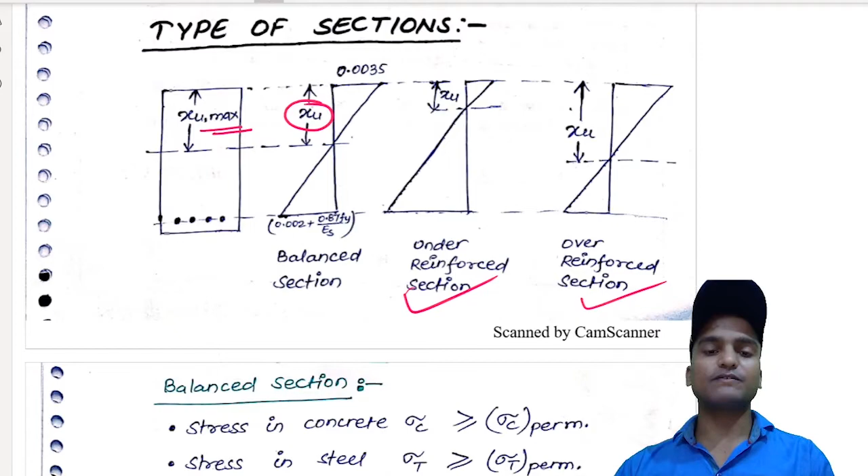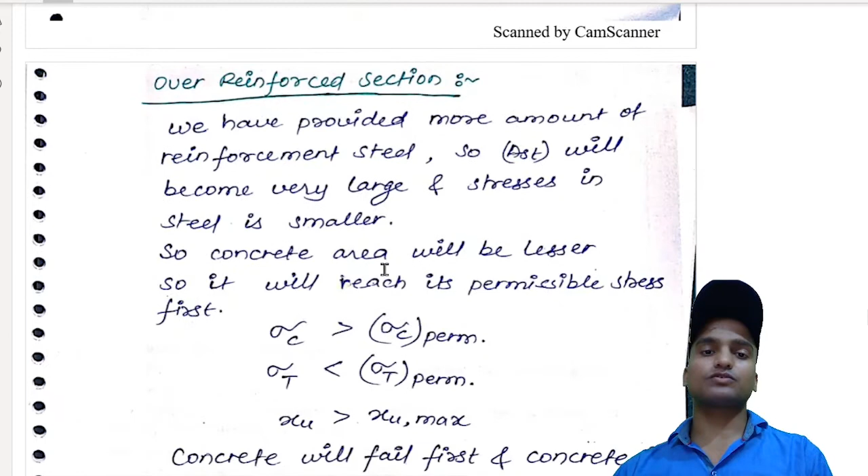The same thing is written here for the balance sections and the under reinforced sections, and we have discussed all this theory in the previous video also. You can go through that and learn how to calculate the moment of resistance in different cases. So basically we want our design to be under reinforced, and we try to avoid the over reinforced design.

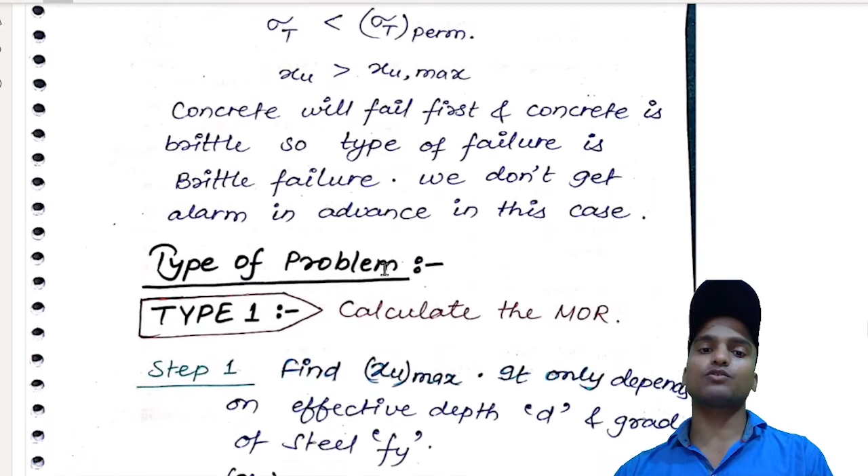Basically in RCC there are two types of problems. The first type is the analysis problem, where we are asked to calculate the moment of resistance. Moment of resistance is asked again and again because moment of resistance is the capacity of the beam.

In the analysis problem we are given all the data like the cross sectional dimensions and the grade of steel and concrete, and the area of steel is provided with the clear cover, and then we have to calculate the capacity of the beam - how much load, how much bending moment the beam as a flexural member can resist.

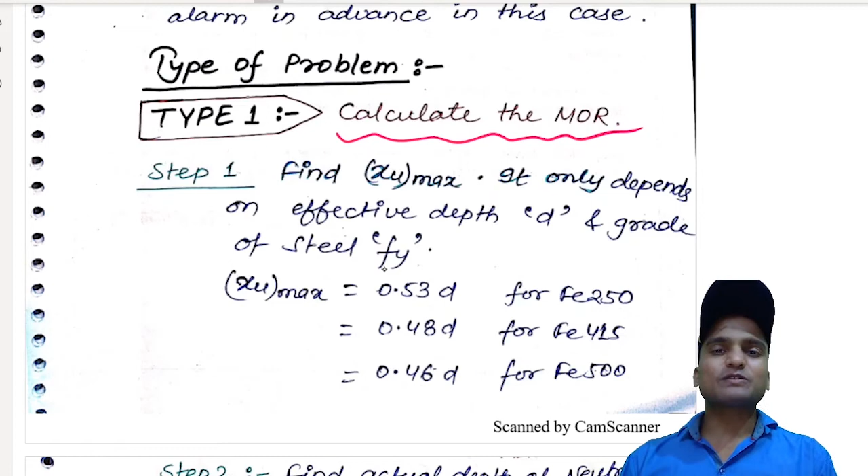These types of problems are the analysis problem, and here in the first step we have to first of all calculate the value of xu maximum. We all know the value of xu maximum only depends on effective depth d and grade of steel fy.

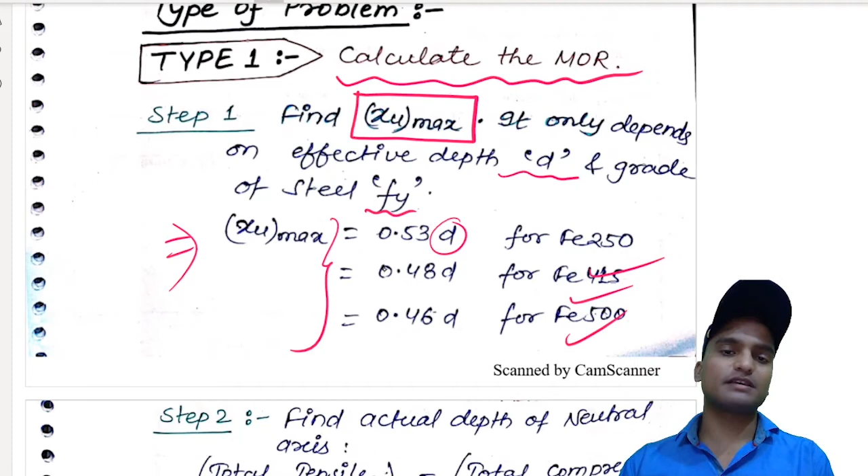We can remember all these three values of xu maximum, or it is also given in the IS code. So if we know the grade of steel Fe and we know the effective depth, then we can very easily calculate what is xu maximum for any cross section. Whatever may be the dimension, whatever may be the area of steel, whatever may be the grade of concrete - it doesn't matter. The value of xu max remains same for the same value of d and fy.

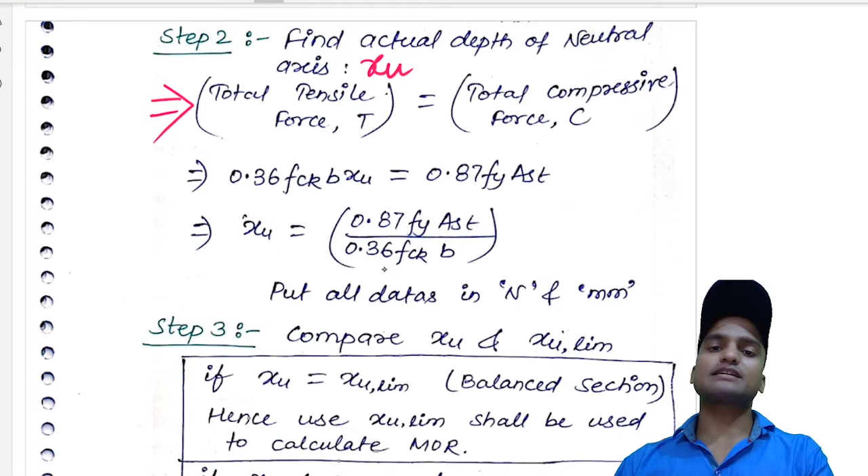After calculating xu maximum, in the next step we have to find out the actual depth of neutral axis, represented by xu. The basic fundamental of calculating xu is equating the tensile force and the compressive force, and we can easily do this and ultimately get the value of actual depth of neutral axis.

Now in these formulas you have to put the values of Fy, Fck, Ast and B in terms of Newton and millimeter. If the design strengths are given in megapascal, you can easily convert them into Newton per mm square, and the dimensions of the beam and the area of steel have to be taken in millimeter or millimeter square. Then you will get the value of xu or xu maximum in terms of millimeter. This is a very important point, please note it down.

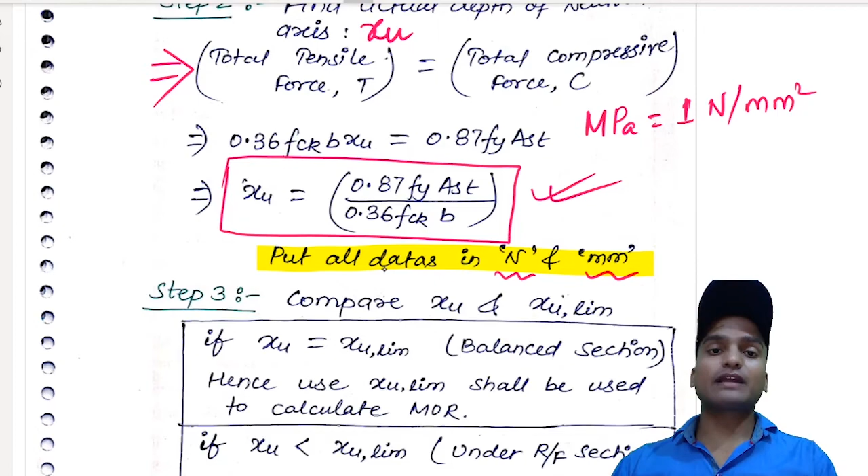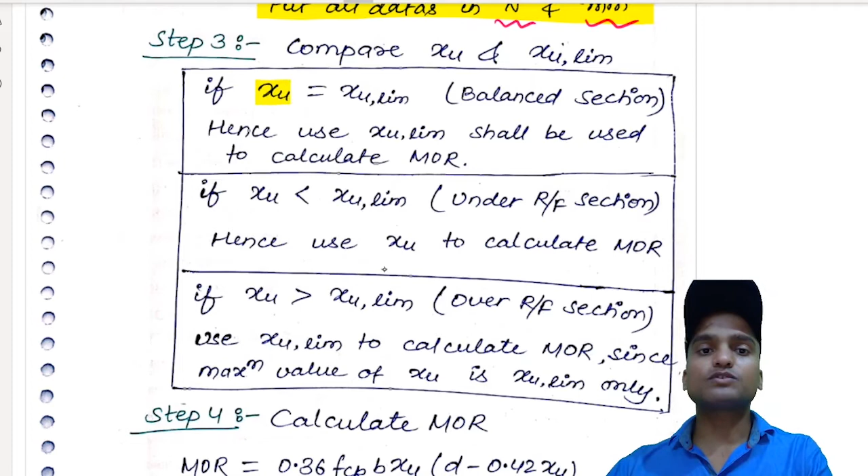After calculating the value of xu and xu limiting, we have to do a comparison. If by chance xu comes to be equal to xu limiting, then such a section is said to be a balance section, and it is very rare to obtain. In a balance section we can directly use the value of xu limiting for calculating moment of resistance. If the value of xu is less than the xu limiting, our section will be an under reinforced section, and in that case we just have to use the value of xu only to calculate the moment of resistance.

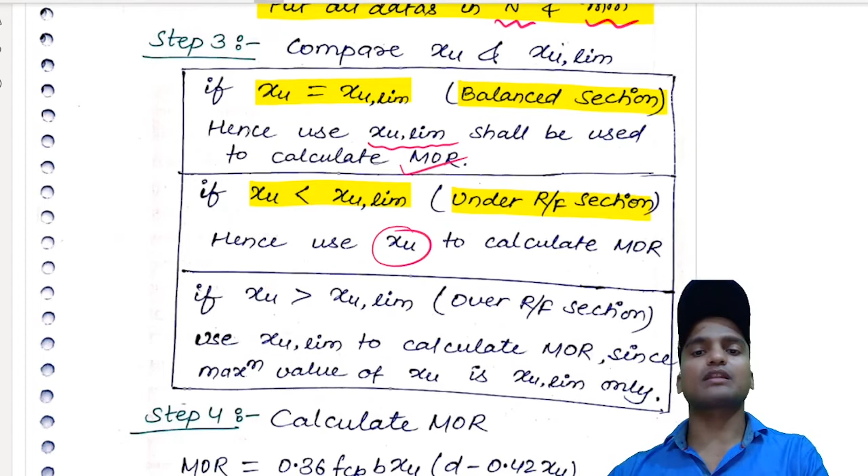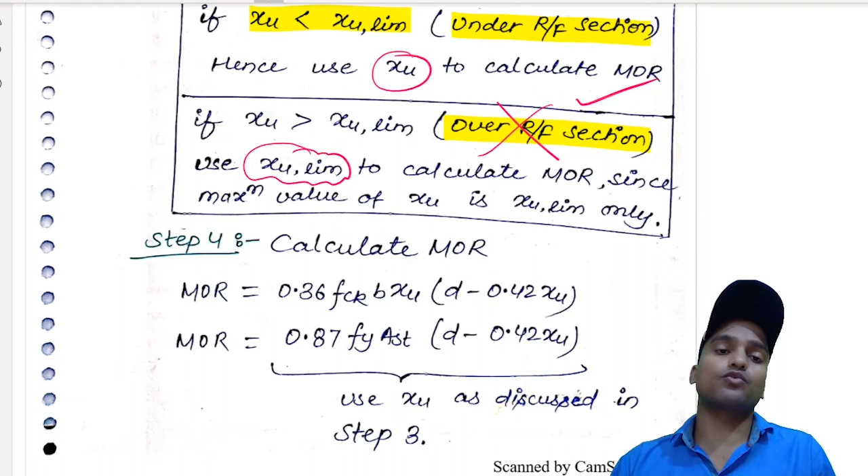If the value of xu exceeds the value of xu limiting, then that section is said to be an over-reinforced section, and such sections we try to avoid in our design cases. We just have to use the value of xu limiting to calculate moment of resistance, since xu cannot go beyond xu limiting. The ultimate moment of resistance in an over-reinforced beam remains limited to the value of mu limiting, which we calculate with the help of xu lim only, using the formula from the compression side, as the steel has not yielded.

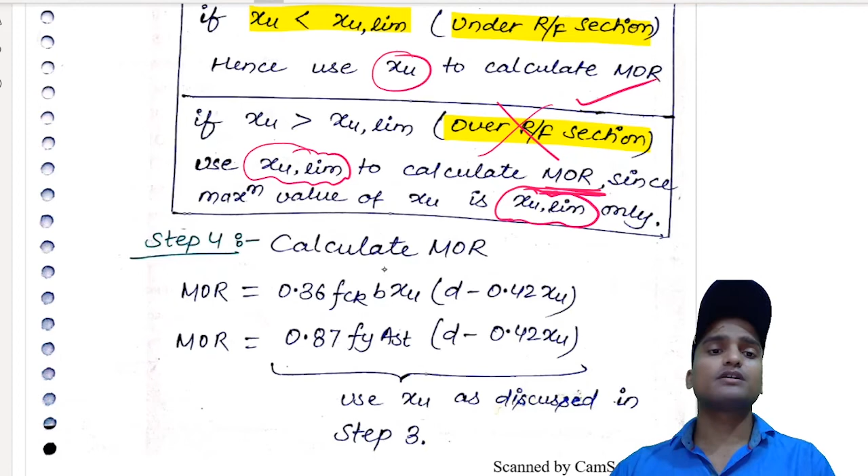So the last step is to calculate the moment of resistance. This is the celebrated formula from the compression side, and this is the formula from the tension side. This is very clear, and you can choose whatever is suitable, comfortable or easier for you. The answer will be the same from both formulas, but we have to use the value of xu as discussed in step 3.

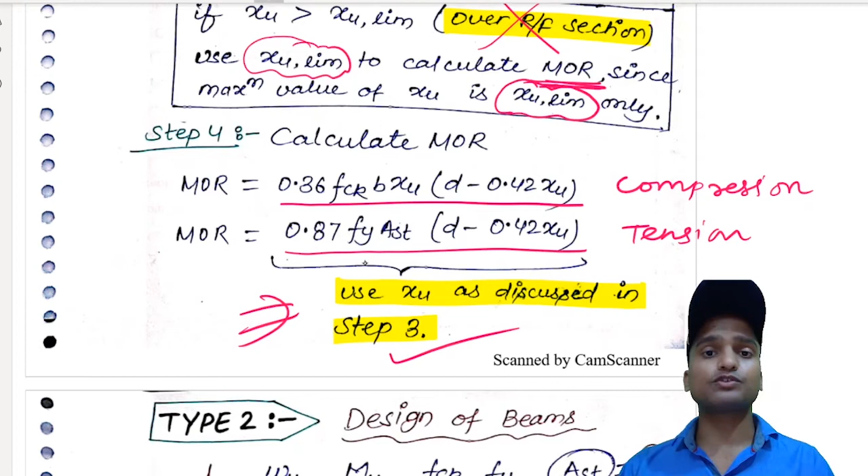At the end of this video, we will also discuss one case of an under-reinforced beam and one case of an over-reinforced beam, and we will calculate the moment of resistance in both cases.

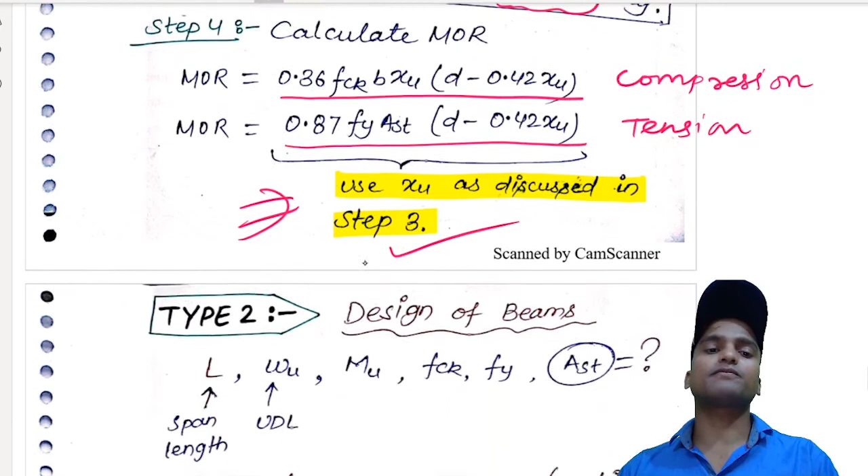Before that, I would also like to discuss the second type of problem, which is generally also asked in RCC problems, but this is not in our syllabus. This type of problem is said to be the design problems, where we have to design the members. The external loading conditions are given and we have to design the individual components, so in our case, we can think of design of beams as a flexural member.

In such problems, the span length, that is the distance between the two ends or supports of the beam, will be given to you. From the span length, you can easily get the value of gross depth of the beam, which is generally taken as 1/10th or 1/12th of the span length of the beam.

Since the loading conditions are given, we just make the load a factored load. How do we make the factored load? We multiply by 1.5. Generally the loading is in UDL format, that is uniformly distributed load.

From this factored load, we can also calculate the maximum moment that is going to act on the cross section. Depending on the components, environment and site condition, we can choose the value of FCK and the grade of steel, and then we do the designing of the beam to ultimately get the value of total area of steel reinforcement. After getting AST, we provide the reinforcement bars in the cross section of the beam.

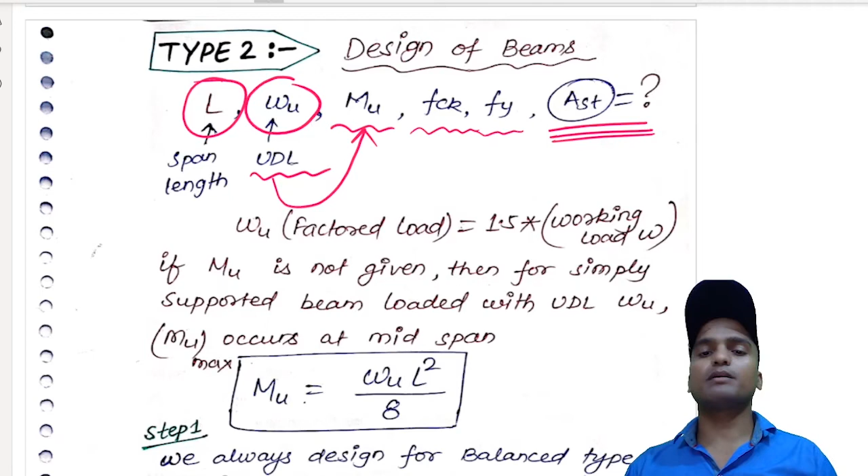So the same thing is written here: WU is the factored load, and factored load is equal to 1.5 times the working load. If MU is not given, then for a simply supported beam loaded with UDL, MU occurs at the mid span. I hope you remember this formula which we proved a year back: MU is equal to WU L square by 8, which is the maximum moment that acts at the center of the beam.

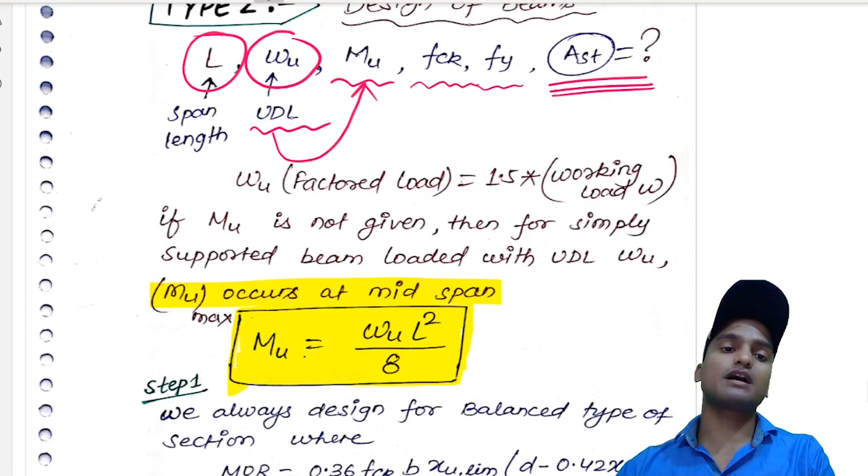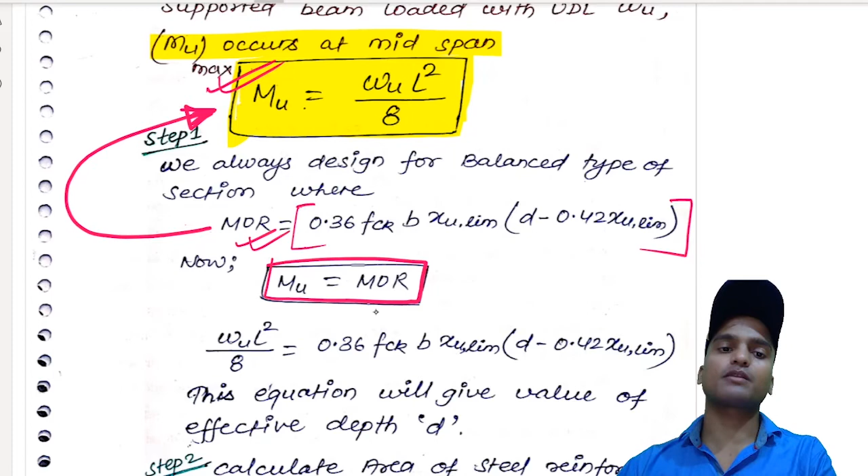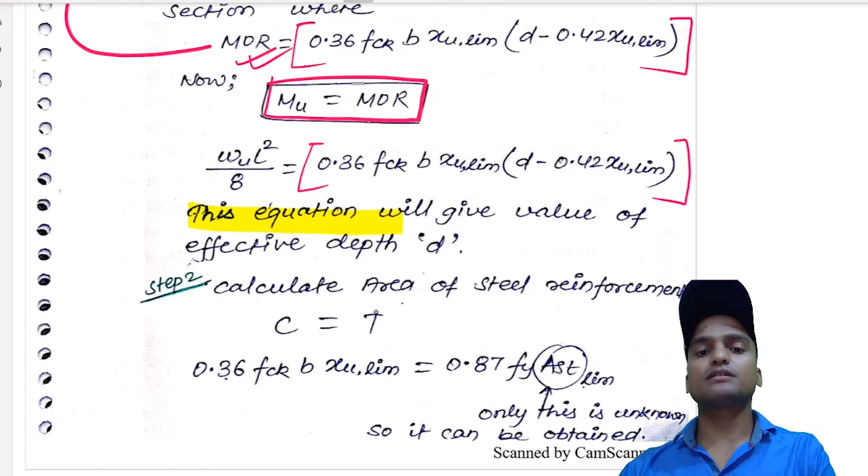So this formula again plays a role in design here. We always design for a balanced type of section, where moment of resistance is equated with this formula, and then we equate this moment of resistance with the value of maximum moment. MU is equal to the moment of resistance we calculated, and WU L square by 8 is equated with this formula. In this equation, everything is given: WU, span length, grade of concrete and XU limit, and this equation will give us the value of effective depth D.

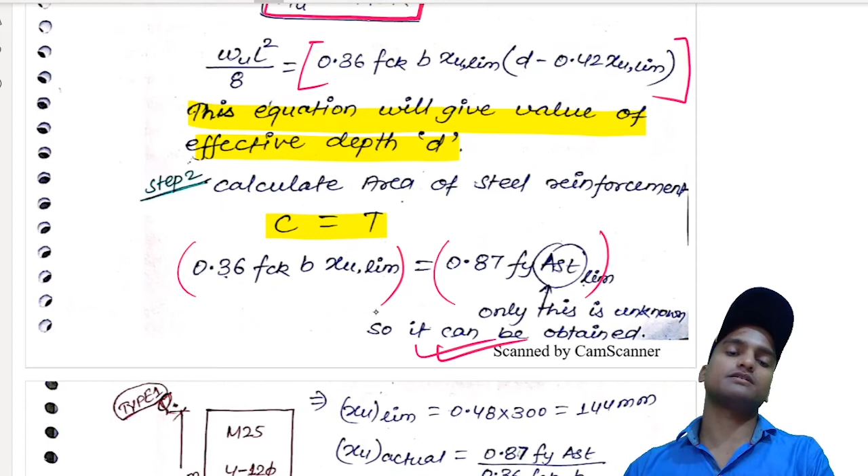In the next step, we can calculate the area of steel reinforcement by equating the total compressive force equal to the total tensile force. The same thing is done here, and here only AST is unknown, so this can be obtained very easily. I'm not going to ask much from the design problems.

Basically we will try to focus on type 1 problems only, because our syllabus is limited up to the analysis of singly reinforced beam. So this is one of the examples of a type 1 problem.

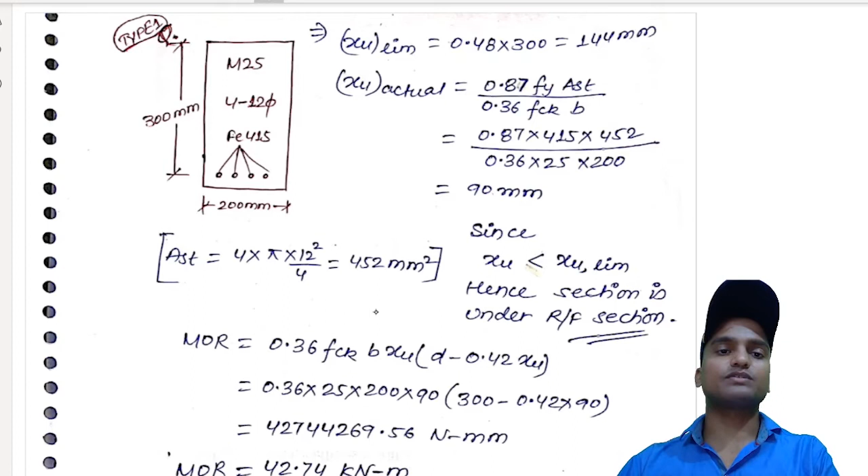Here in this case, the dimension of the beam is given: 300 mm into 200 mm. So here effective depth directly is given as 300 mm, and the grade of steel used is Fe415. So we can easily calculate XU limiting, as the first step says, which is equal to 0.48 times D, equal to 300 mm for Fe415, and we get the value of XU limiting.

After this, we will also calculate the actual depth of neutral axis using this formula. Here we have used all the values in terms of Newton per mm square or millimeter square, and we get the value of XU actual equal to 90 mm.

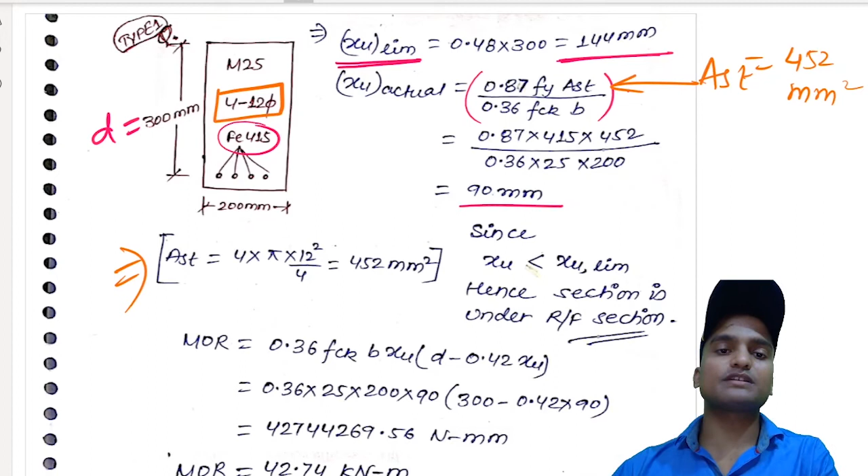Now many of you must be wondering, how is this AST calculated? In this formula we have used the value of AST equal to 452 mm square. How is it obtained? This is written here: since we have provided 4 bars of 12 mm diameter, you can remember this is the notation of providing steel reinforcement in the beam.

I hope this notation you must have studied in working stress method also. So 4 here represents the number of bars, 12 here represents the diameter of bars, and the symbol is the notation for diameter. So total area of steel reinforcement provided is equal to 4 times pi d square by 4, where d is equal to 12, and we can easily get the value of AST.

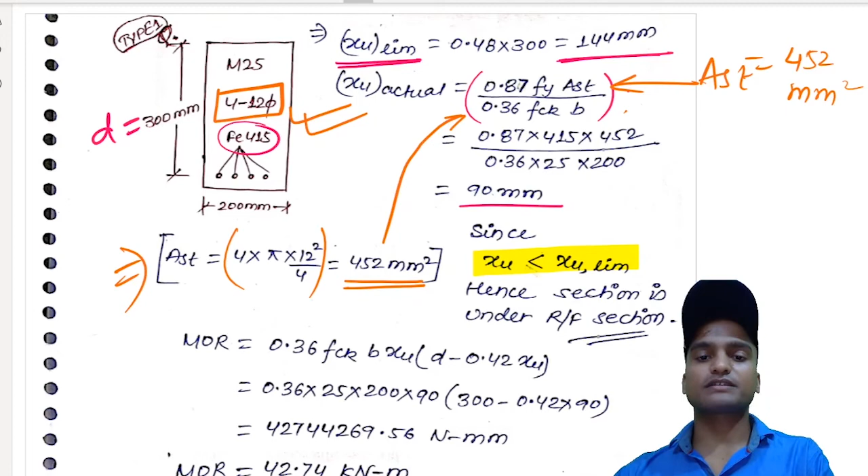The same value is used in this formula. So after calculating XU limiting and XU actual, we can easily observe that XU is less than XU limiting. So our section is an under-reinforced section, and it is very easy to calculate the moment of resistance using this formula.

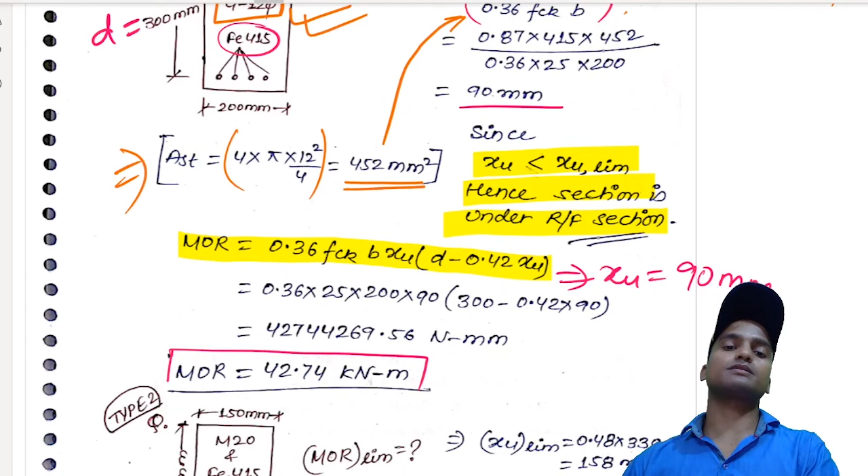Here we have to use the value of XU equal to 90 mm that we calculated, not the value of XU limiting. In that case, XU is equal to 90 mm, and if you do this you can easily arrive at the moment of resistance. Is it clear to you? And you can always convert it into kilonewton meter.

Now for your reference, I have also put here a type 2 problem. If you look at this problem, we are not given the area of steel reinforcement. Rest everything is given here: the effective depth, width of the section, grade of steel and concrete. So how do we calculate this area of steel reinforcement?

Just like in the previous case, the first step will be to calculate the XU lim, and after this we also calculate the limiting moment of resistance. We use this value of XU limiting in this equation, and we arrive at the value of MOR lim.

The next step will be to equate the compressive force equal to the tensile force, and then you can obtain the value of area of steel, because this is the only thing which is unknown here. When we get the value of area of steel equal to 474 mm square, now it depends on us which diameter of bars we are going to choose.

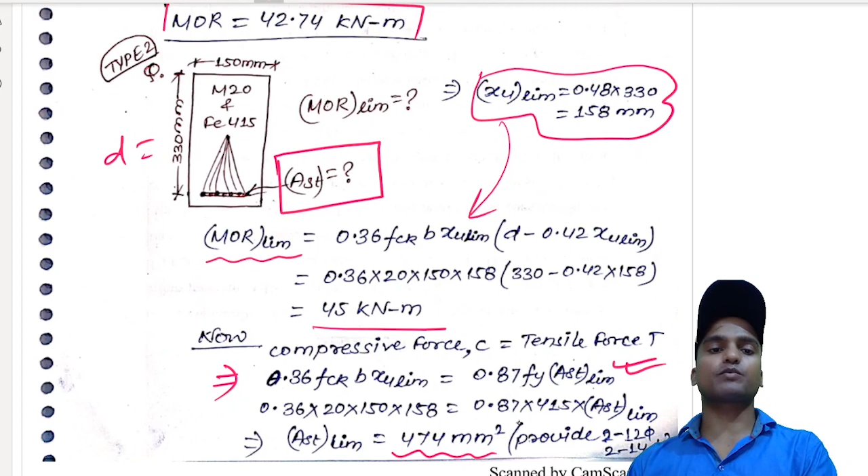So I have taken 2 bars of 12 mm and 2 bars of 14 mm. The total area that we get from these bars must exceed the value of AST limiting, and I just provide these bars at the bottom of the beam, since this is a singly reinforced beam.